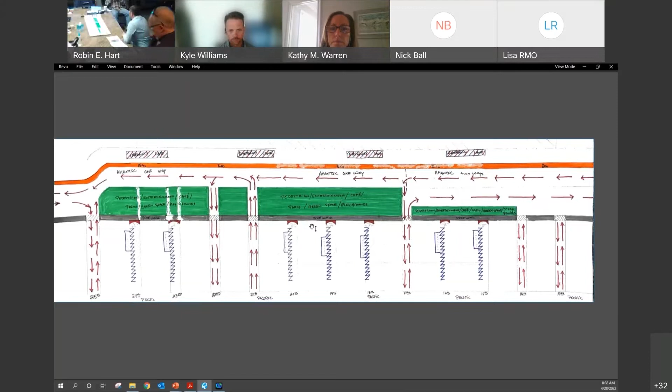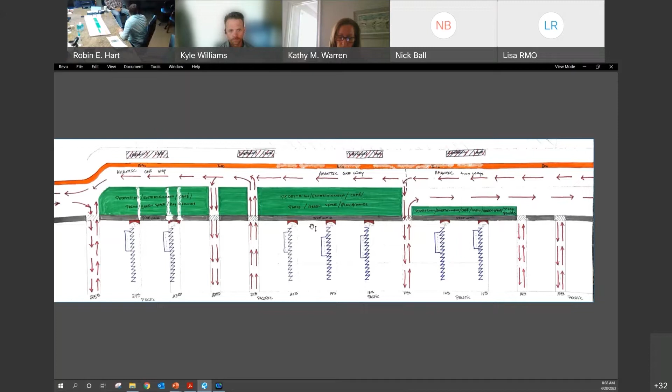So this is just a concept for the core area, between 15th and 25th. What I'm trying to accomplish here is a few things. I'd like for public safety, which should be our number one concern on everybody's mind - without a safe environment, people won't come back. What this does is allow for an area to be managed by creating a more user-friendly, pedestrian-friendly area. If you look between 17th and 21st Street, in the red on 18th, 19th, and 20th, as well as a couple streets south and north - 16th, 15th, 24th, and 23rd - we've cut the road off from going through to Atlantic Avenue.

I got that idea from the neighborhoods, from what they did and how much it helped them. What it also accomplishes is being able to put parking on the side streets between Atlantic and Pacific, and that can be paid parking, just like we currently do with off-season parking, being friendly for locals.

The major change would be Atlantic Avenue from 17th to 25th becoming one way, but we'd leave an area for a bike path as well as an emergency lane for police, fire, and EMS to move around. 25th Street would be a way to get off of Atlantic, and the Fountainhead idea would be at 17th Street. So the main thing this is going to affect is Pacific Avenue.

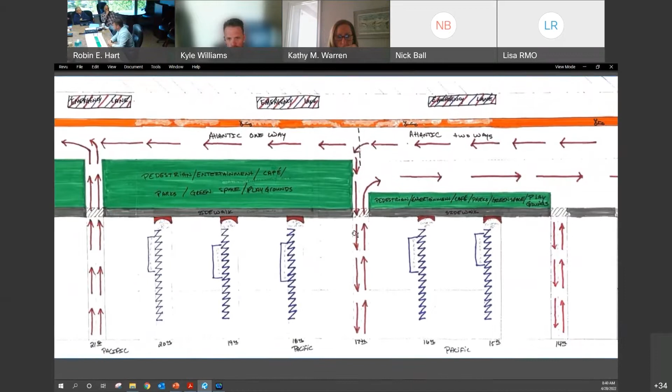Turning Atlantic one way in the core area, coming off the interstate, you would only be able to take a left when you got to Atlantic Avenue, or going north.

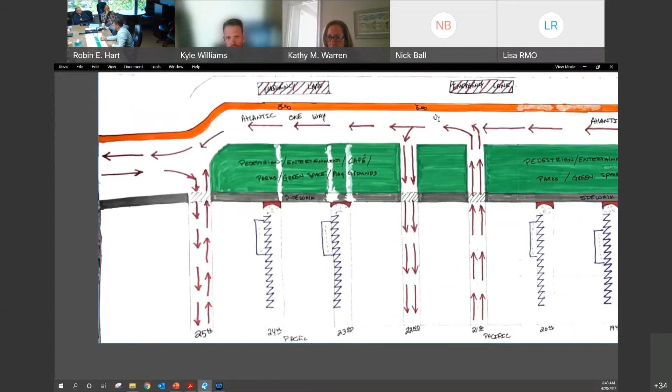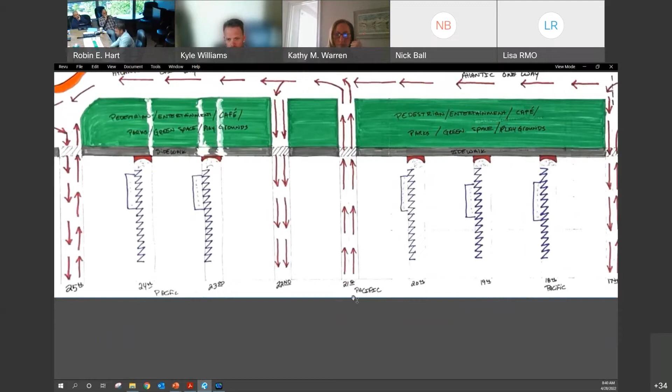I believe there's been discussion about the McDonald's the city has owned, and being able to put in a couple of turn lanes there in order to take traffic south that needs to get to their hotels. I know in the past the hotels have had issues with one way. The last time it was brought up was quite a while ago, before Expedia and stuff like that, where visibility was key.

Now most people look at their phone and drive straight to their destination without having to find a place that has vacancy. So I really want to hear from the hotels, more so than most, about how this can affect them and what could work and what couldn't. I have a meeting with John tomorrow, so I'll get some good input there.

But what it's trying to accomplish is a managed area, which is what we can do with the green. We can turn those into linear parks, and if we're able to call it a park, we're able to open and close the parks. That means if there's any issues down there, we can close the parks and nobody can go into them.

The parks could be used as a pedestrian area, entertainment, cafe, park, green space, playgrounds. My thought process is that these would be elevated to the same height as the sidewalk, allowing for easy flow back and forth.

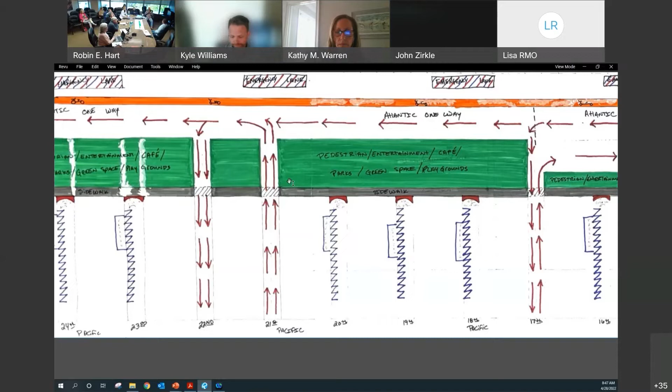Okay, I think it's a pretty unique idea, Mike. I know we're going to talk more about it tomorrow. Just some questions or thoughts off the top of my head. How does this work for bikes? Are you going to have a two-way bike lane through the one-way drive lane, or just not sure how that would come into play. I can see bicyclists aren't going to pay attention to a one-way 10-block radius, more than likely.

Also, with Pacific, the dome site construction, I'm sure that's going to play into this at some point, because I'm sure they're going to have some lane closures and different things, which could cause some challenges. The side streets, when you close them off, I assume there would need to be a turnaround area at the end, because you can't have people pull in and then have to back all the way out onto Pacific Avenue. That'd be rather dangerous.

And then, yeah, hotels do get a lot of walk-in business still, especially in the summertime. You'd be amazed how many people show up in Virginia Beach without a reservation and are either searching on their phone or driving from hotel to hotel to hotel trying to find a room. So it's definitely something we'll want to talk to our association about and get their feedback on. But overall, I think it's a unique idea, something definitely worth exploring a little further.

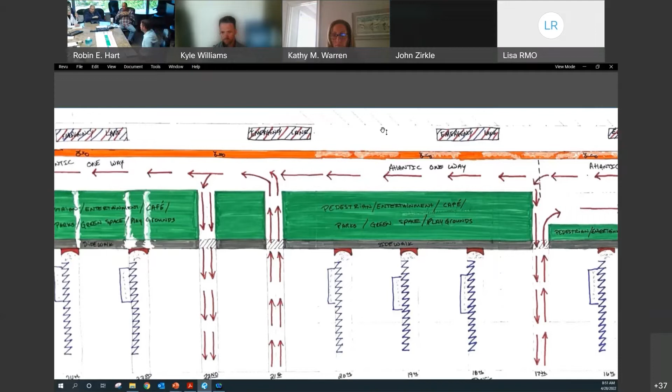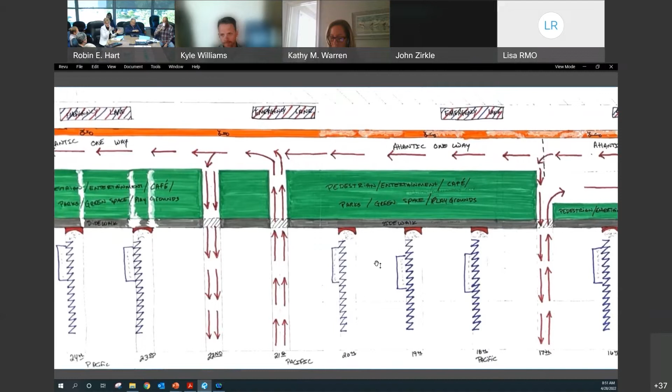I have a question. Yes ma'am. This is an opportunity for a real paradigm shift on Pacific Avenue, and I see us trying again to add more traffic to it. Going back years now, at one point we talked about making a ring road or separate area that moved that through traffic off of this area, coming around Bird Neck area, coming back up on Laskin Road. That would create this area being something special because there's a tremendous amount that cuts over - Rudy shoots through all the way up to the north end going however many miles per hour.

So is there a way to factor that in, that instead of putting more, is there a way we can redesign this so it actually pulls that through-traffic back? We're not trying to clog up Pacific Avenue with through traffic - when you come here, this is a destination area, not a cut-through area, because I can see if we're not careful, these people are going to be cutting off and going through.

Arctic is going to become the major freeway, Mediterranean is going to become the major freeway if we don't figure out a way to get people's mindset to understand this is something different. You have come here as a destination, it's not a through street. So I'm willing to explore this to see what we can do, but I need to be careful about how much we push back into these neighborhoods if we're not careful.

And I don't want to see Pacific Avenue become more clogged, faster, with 10,000 extra cars. If anything, I'd like to see us make Pacific Avenue a much more gentle street. Since they've added those new sections up above 31st Street with the islands and the overhead park, it has a different feel - people tend to be going a little bit slower, there's just a sense to it. Once you get past 31st Street again, it's like Katie barred the door - we're going to a fire somewhere.

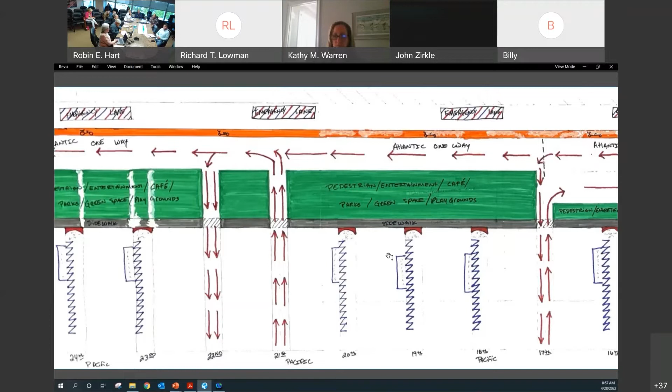Never is. Okay, I think it's a great opportunity and unique, like has been talked about before. My concern would be with the busy days we have during the year. Public safety will be an extreme stakeholder in this when traffic gets congested in the oceanfront area—if they have to respond with heavy apparatus, police response, EMS, should there be an incident. If you move everything to Pacific and the back streets, everything's going to become even more congested on the busy holiday weekends we've got. So the public safety folks are going to have to weigh in pretty significantly.

I had an initial conversation with Captain McBride, and it was met with reserved enthusiasm. He seemed to really like the concept, but wanted to see what it could do. From a pedestrian crowd control standpoint, he saw a huge benefit for it. We didn't get into the details too much, since it was over the weekend and I was kind of hanging out in front of the substation with him.

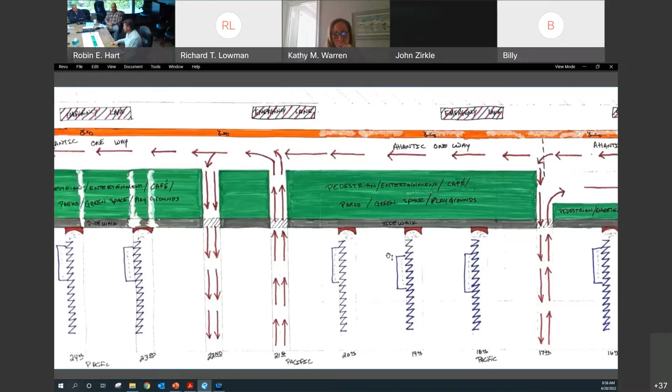One thing I didn't mention is 17th Street would become kind of the major area for a lot of traffic. We have a very timely and unique ability right now to mold how Virginia Beach Boulevard at 17th Street works—it's going through design right now. Instead of having a lot of that traffic come off 21st Street and go south to 17th Street to get on Atlantic, if we could get Waze, Google Maps, Apple Maps, whatever, to route people going southbound on Atlantic past 17th to get off at Bird Neck and come down Virginia Beach Boulevard and take a right—I'm not a traffic engineer, but it could alleviate some of that stress on Pacific between 21st and 17th.

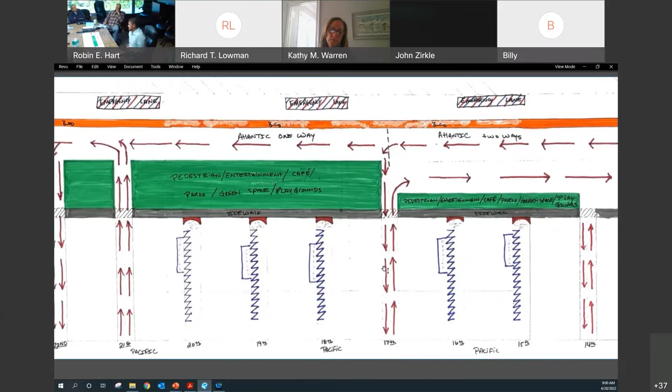That was one other thing. I don't know if this has been addressed, but Chris Nykirk had a question in the chat asking how the parking streets work, turnarounds at the ends. I think what she's trying to say is, is there enough room for people to turn around in the cul-de-sacs, and how much parking can we get there? These are answers that I don't have.

Yeah, the mall in Charlottesville is what is in my mind on that, if you've been there, and it's tight. It's messy on Saturday when everybody's down there. If you pull in there, it'll take you a while to get back out, but you can do it. There are curb cuts at the end that go into parking lots, and if you don't want to stay, you don't have to. You can get out. I've done it, I've seen people do it, but it's not easy.

Well, I think it's important to note that this is very preliminary, so we're not even at that design stage, but we know there's no way this can progress if we can't get people in and out smoothly.

And the Charlottesville Mall idea that was just brought up too - one other thing to point out there is there are streets that go through the mall. So just using 19th as an example, it's curb level, so it's apparent to the driver that you're driving through a pedestrian space. So there is maybe a hybrid here where these are partially open, closable, something like that. I think these are all details we need to flesh out if we look at this going forward.

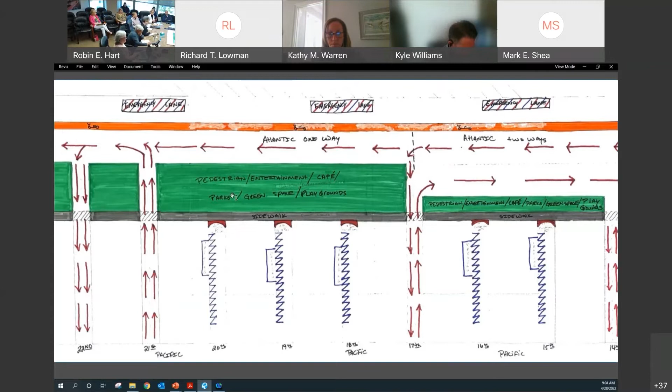Is it one? If we're trying to reconfigure and we have an opportunity here, some of these, I don't want to dismiss them, but is there a way we can work with these folks, maybe tighten them up? I'm looking for ways to make things happen rather than ways that become stumbling blocks that we never move off dead center, and we just stay with what we have today, which we know is not our most ideal opportunity. So how can we work with some of these folks?

Mike's right, the only option you have is the emergency lane, so public safety's got to be involved in all of this, and maybe that's something to be looked at. A lot of times it's thrown aside, as we'll get to it later, but it needs to be addressed up front. I agree - everybody's got to get deliveries. That's one of the details we need to look at.

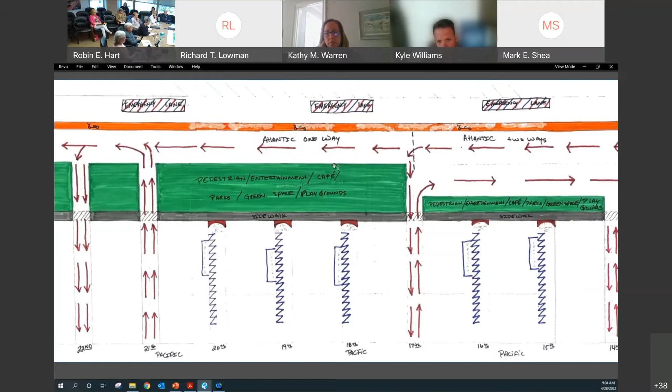Definitely. I think one good thing is that it's very compact in the area we're going to be doing it, and it's in the area that needs the most help. The south end is okay by itself, we don't have as many issues there, as well as the north end. Central Beach is stressed with people, vehicles - it's got the most concentration of people, which when you have concentrations of people, you have issues that arise from that too.

I truly believe that this can help every single issue that we're actually trying to solve. I wouldn't have brought it up this late in the game and tried to get some consensus to at least explore it further if I really didn't think it was going to be beneficial.

And we could even turn this into something iconic for Virginia Beach. We could do the landscape so that it spells Virginia Beach out, so from an aerial it kind of gives that, and that's what you think of when you think of Virginia Beach, is that area, just like the Charlottesville Mall.

Or we could do something fun, make waves out of landscaping, just something different and unique that everybody will remember. Virginia Beach by...

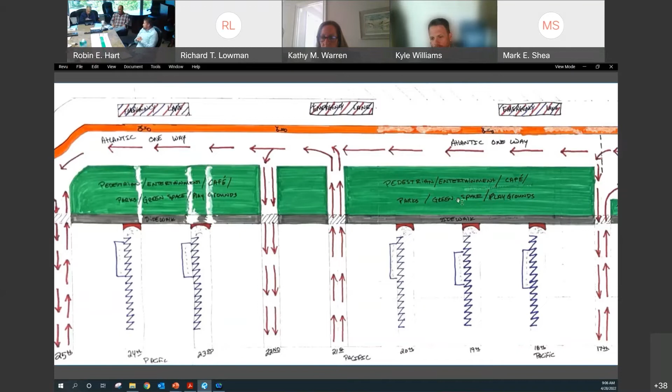BJ and Martin. Kathy, I just wanted to throw one thought out on the table, and this isn't just for this scenario, but in years past we had a program that really emphasized getting off at Birdneck Road and accessing the beach from a lot of different areas. I can't help but think that would serve us well to incorporate into whatever we come up with. I think at that point we had designated Norfolk Avenue, and there might have been a Sand Dollar, or 19th Street or 17th Street - I forget what the streets were, but we had a pattern people could follow coming in. Just a thought that might help in a lot of instances here. It might alleviate some of the issues we're talking about as far as Pacific Avenue and keeping the traffic from getting pushed back into the neighborhoods. Just a thought.

That's a good thing too, to mention. The traffic study that we're going to see with Pacific Avenue, I would imagine, is going to be extremely high volume. But if we're able to make these changes, like BJ said, and possibly get the routes changed in Google Maps to get people to their hotels, I think those numbers could possibly stay the same instead of increasing even more. But studies will tell, I guess.

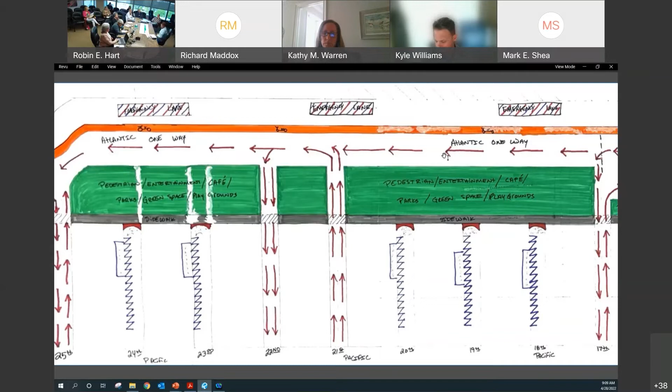Thank you, Richard. You're welcome. Anyone else? Hey, Josh Goyet from the fire department. Can you hear me? Yeah, yes, yes.

So just from a fire department or public safety aspect, some considerations with this. We like the fact that you've got the emergency lane going because that's going to be important for us, giving us access to all the buildings on the east side. But any fire or incident on the west side of Atlantic, especially with the green space, puts the buildings further away from our trucks. Depending on where the hydrants are, whether we move them or not, we'll obviously have to get close, so we can't do that work from the emergency lane. We end up in the travel lane for those incidents, which means we likely have to shut down this section of Atlantic Avenue for any even fire alarms for incidents on the west side.

And if we divert a whole lot of traffic, 17th Street then gets really backed up. Just keep in mind that's where the fire trucks and EMS trucks tend to come from, because that's where the station is.

So just some consideration - even though everybody else will have to turn south when they get to Atlantic off of 17th, we will need that ability. There can't be a shut off for us to be able to turn left there, because that's going to be our access, and we can't go around the entire Rudee Loop just to get to where we need to go.

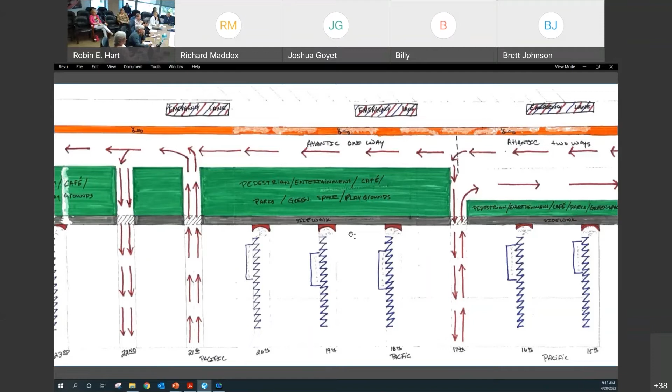One thing guys, just for us - we see the questions in the chat, but I think we need to, and Kyle I'll leave this to you, but I think if we want to accomplish what we want to accomplish today, we need to probably move into the document. Understanding that we're going to the Hotel Association on Monday, we've got to talk to public safety. So far we're hearing a lot of good comments on this. So what we're going to have to think about, depending on the outcome of the other stakeholder groups, is how do we move the plan forward?

We have a lot of initiatives that we're going forward with regardless. Obviously the pilot - there's work that we can do on the whole north end of Atlantic Avenue. So it's not to say that if we explore this further it's going to stop the progress. We just need to have some conversation internally and with the steering committee about how to move this thing forward.

I think it would be beneficial, Kathy - we've gotten a couple initial comments from fire and EMS as an example, but I think it would be beneficial if you all could create us a list of considerations that we need to be looking into as part of the study, or sub-study, of this area. That way we can get our heads around what types of things we need to be evaluating. And I would look to the individual technical experts of those specific areas to guide us on that - that could get us started with at least a short list of things we need to be checking each of the boxes on.

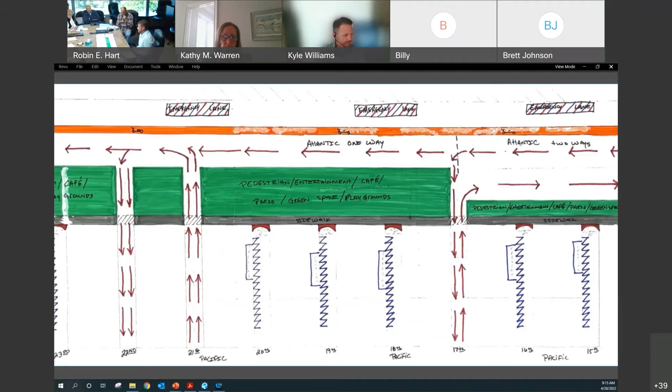All right, I'm going to flip back over to this. I'm going to hit the one-way concept fairly quickly with the connector streets, just to give a brief overview. Again, this is going to be another one that's going to require some additional conversation. This probably will come into play as we're looking at the new concept for Atlantic Avenue.

But just to give a brief overview of the conceptuals of what we've looked at to date, the intent of this is to try to one-way the streets between Atlantic Avenue and Pacific Avenue, with the main intent of creating additional on-street parking, either through the ability to angle the spaces and create more stalls, or in some instances adding additional parallel spaces, just depending on the width of the street.

The screen capture I've got here is just 34th to 37th Street. We would be keeping some of the key corridors two-way, so for example 5th Street, 9th Street, 17th, probably 18th with the emergency access, 31st Street, 30th Street, et cetera.

But just preliminary thought on how much space or how many spaces we could potentially add, anywhere from 64 to 170 spaces, just depending on the configurations of the street. So again, more conversation, more study, traffic impacts related, access to properties and parcels, and just some of the things that need to go into this a little bit more before we advance it forward. But again, just wanted to bring your attention to that.

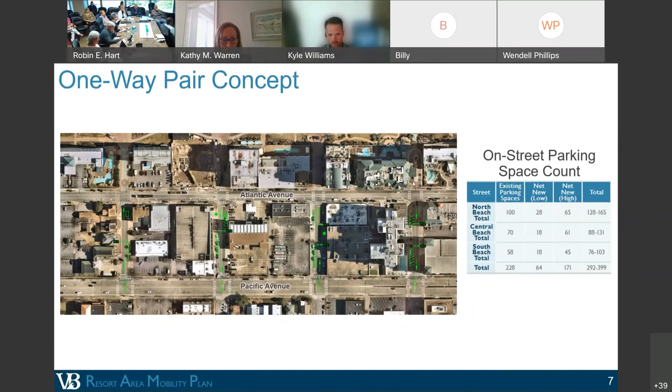And then Jonathan, I think you are up. I'm going to turn it over to Jonathan for document preview, orient you to what we've pulled together, where we're going to be hoping to get some of your input and feedback. And I will stop sharing and allow you to take over control.

Sounds good. So yeah, when we think about what's coming your way next week, we're really kind of characterizing this as a review. Most of the information that you're about to see over the next week is information that's been previously shared through a lot of our previous meetings or previous surveys, or even some documents that landed in your hands previously. Some of that information is packaged a little bit differently, but for the most part, it truly is a review of stuff that you have already seen.

With what we've already discussed this morning, over the next several days, we are going to continue to make a few tweaks to the document as it currently stands before it lands in your inbox. And part of that is to potentially figure out how do we advance the overall mobility plan while still leaving the door open for exploring this new concept for the central beach area.

And so with that, we're going to provide the report early next week. And as Kyle alluded, we have created a survey tool for us to collect input from you all. That survey tool is SurveyMonkey, so it should be familiar, similar to some of the other reviews, most recently with the multimodal and the parking strategies that you all provided input on just a few months ago.

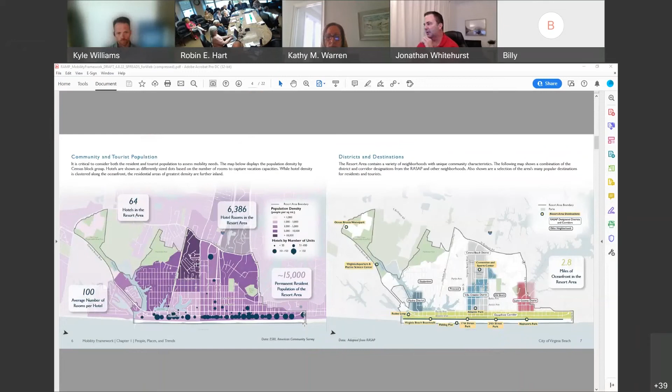This would be volume 1, the mobility framework. It starts with acknowledgments, table of contents, and then we get into the meat of people, places, and trends. This is the summary of existing conditions about population and where people are traveling. We've got a spread here about special events.

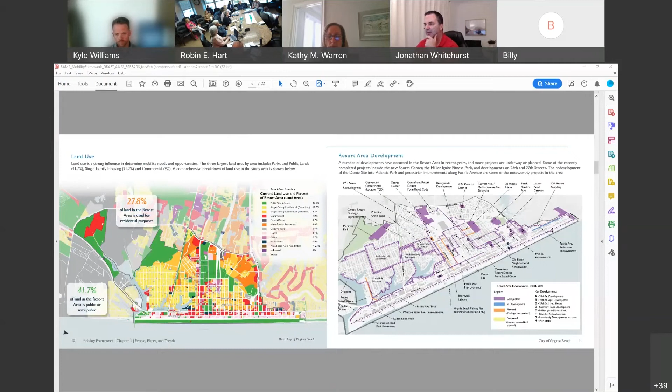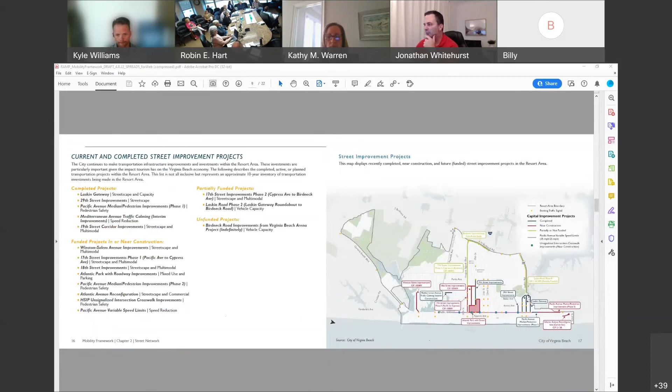We get into land use and the resort area development that's been adapted and updated from what you all may have seen in the RASAP a couple of years ago. We have a section about the street network, where you'll find more detailed information about traffic and congestion. We highlight the current and completed street improvement projects.

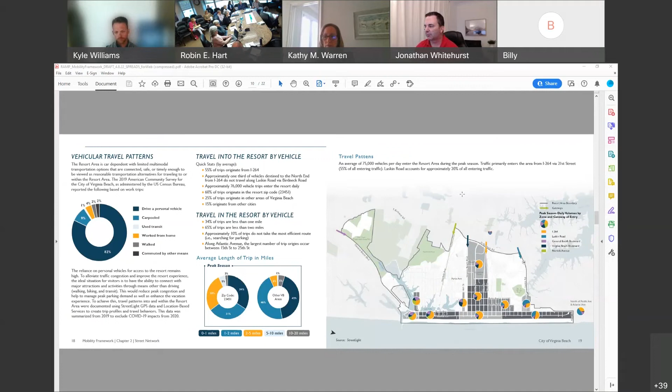Then we get into a lot of the details you all have previously seen related to how people are moving around the resort area in terms of vehicle delay and crashes and traffic safety. For the active transportation section, we're providing an existing overview of the bicycle and pedestrian facilities, and we're taking information from the active transportation plan and showing bicycle level of stress.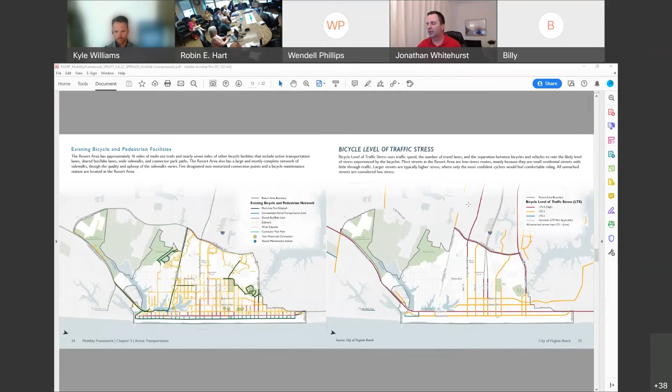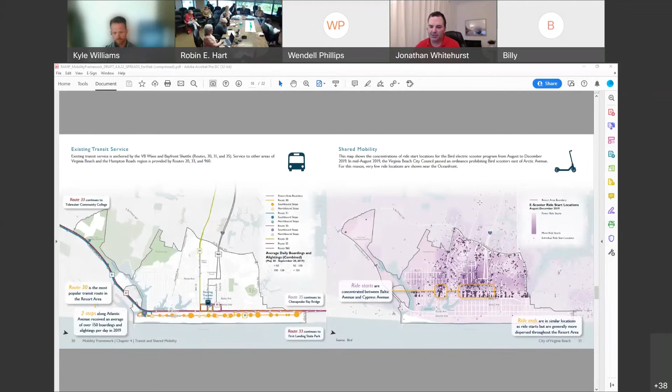And then we get into transit and shared mobility. Here we're reviewing the different bus routes that exist and what we've heard related to transit and the trolley and all of that. We have some information here on shared mobility, so the scooter trips as well.

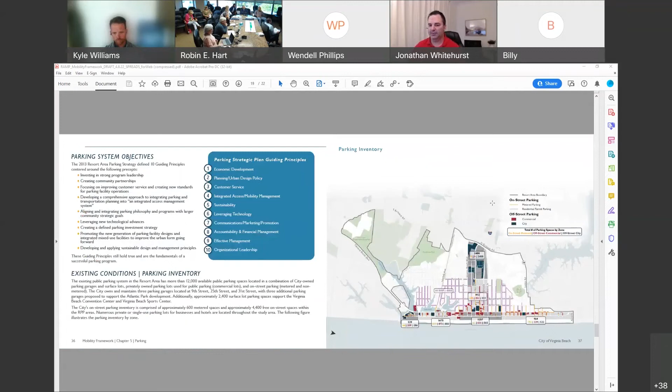The parking section for the mobility framework again goes into both the supply and the demand side of parking. All of this is to tee up the parking strategies and parking projects that are recommended in volume 2. We conclude the parking section with an overview of parking rates and then a quick recap of the RPP program. And that's really it.

So that's the first volume, all about existing and projected conditions. So when the survey tool and these documents arrive in your inbox next week, what you're really going to do is focus your attention on the second volume, which is where all of the recommendations are included.

We've got an executive summary here to tee up the process, an introduction in terms of an overview of the mobility process and how it all came together. A quick recap of the guiding documents. We've got the mobility vision and goals here on this spread, and then we jump right into the strategies. The strategies themselves are put into 2 separate buckets: the multimodal strategies and the parking strategies.

As I mentioned, what you're seeing here in volume 2 is really just a quick sentence or 2 about each of these strategies. But if you were to flip over to volume 3, the appendix, you'll see that the information is repeated a little bit, but there's just a lot more detail. So as you're reviewing, if you see, okay, I don't quite understand what exactly strategy 1.2 is under objective 1, go to the appendix, read a little bit more about it, and hopefully it'll provide you the background you need to weigh in on that particular strategy.

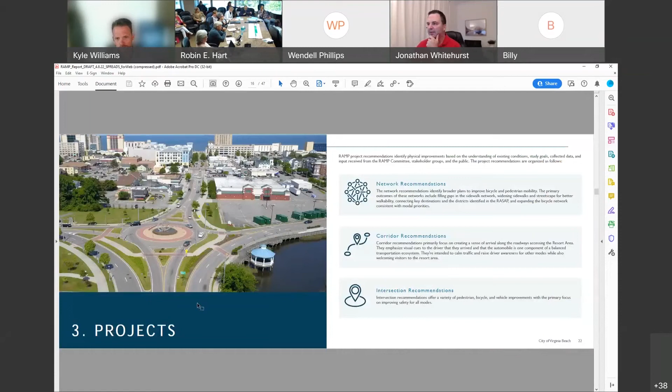The next thing in volume 2 is the list of projects. We've grouped these into network recommendations and then corridors and intersections. The network recommendations are the recommended bicycle network and the recommended pedestrian network. Again, this is information that should be familiar to you all if you've been following along as we've been going through this process.

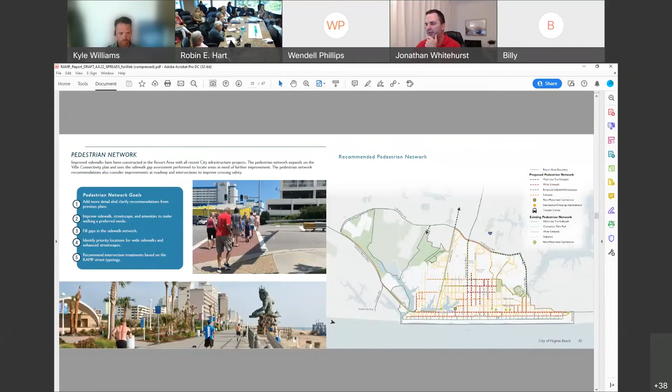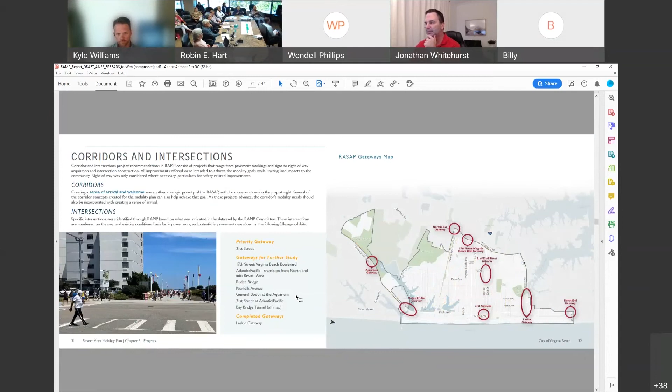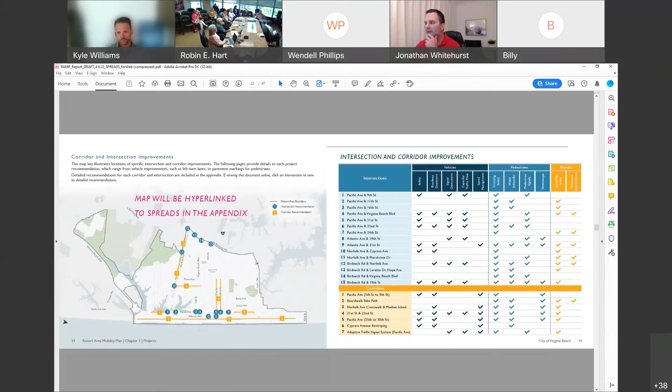The corridors and intersections section provides a quick overview of that information and then directs you to the appendix if you want to dig deep into a particular location. The corridor and intersection improvements are shown in the table on page 34, telling you what types of improvements are needed at different intersections and along different corridors. Eventually, we're going to hyperlink this information so that it's easier to navigate through the document.

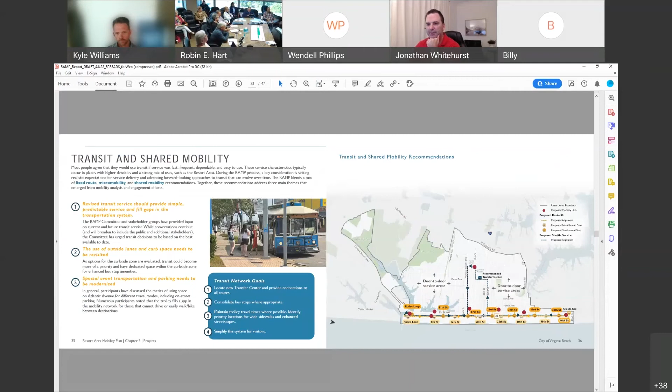As it relates to transit and shared mobility, we've grouped these recommendations into a few different categories. We've got route recommendations, which talk about changes to Route 30, adding the fixed shuttle service, and creating the new transfer facility. We've got the microtransit recommendations, where the RAMP document makes reference to the pilot project that is about to get started very soon, and then how we take the information from that pilot project and eventually evaluate what is the best permanent solution for microtransit and the trolley in the future.

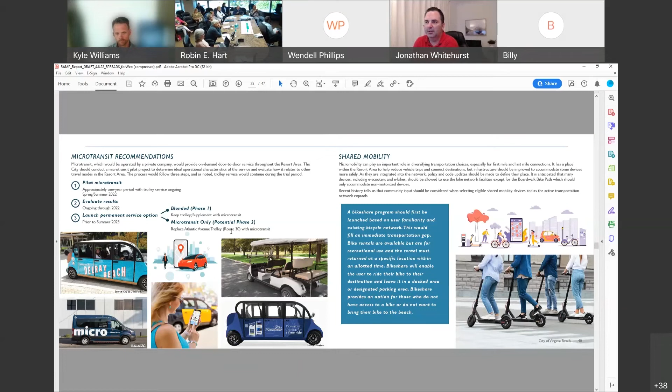For parking, we've got some specific parking projects. We talk about parking wayfinding, and the off-street and on-street parking inventory, and some of the projects that could be used to increase parking supply. Kyle alluded to some of those just a couple of minutes ago.

The fourth section of this volume is about Atlantic Avenue. Here we provide an overview of the process that we arrived at to get to the recommended concepts for each of the three segments: the segment north of 25th, the segment south of 17th, and then that middle section that we're going to evaluate in a little bit more detail.

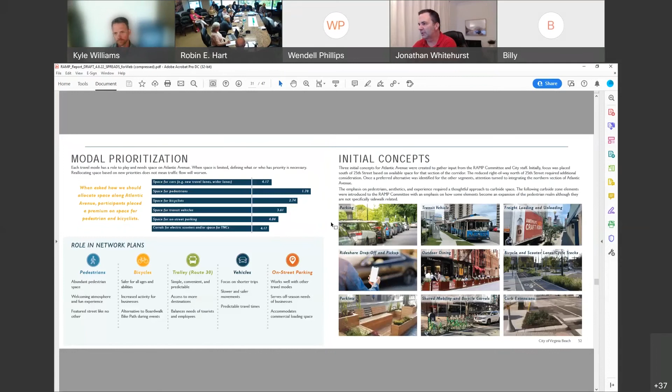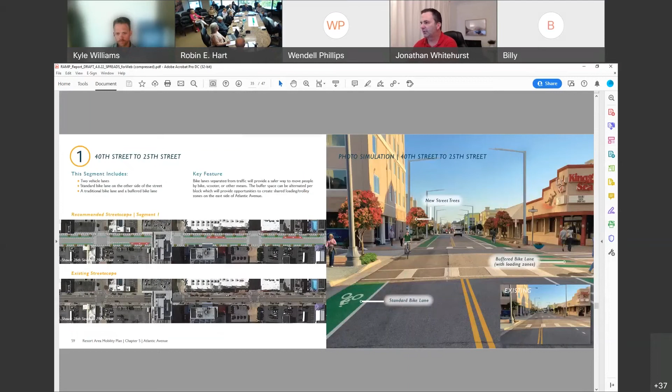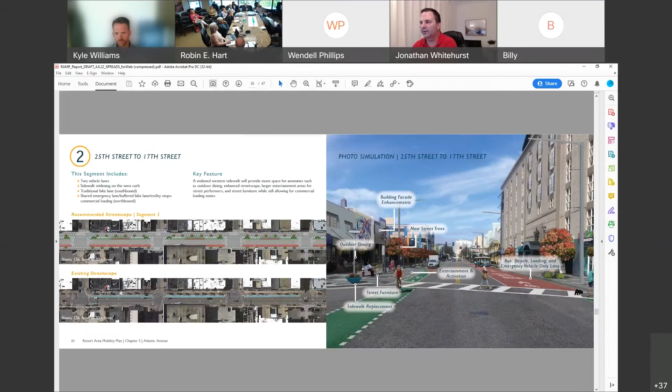For each of those sections, we're providing the existing streetscape, the recommended streetscape, and then a photo simulation so that you can visualize what the vision is for that particular section. So that's 40th to 25th, 25th to 17th -- and again, this is one that we might need to pull out of this particular report so that we can allow the due process to evaluate the new alternative -- and then 17th to 5th.

Then there's a series of design considerations that we're going to ask you to weigh in on. Here we're talking about different design options that could occur at any particular intersection along Atlantic Avenue. You can see it's color coded on the line, starting with 5th Street and going all the way to 40th. It's saying, for this particular intersection, this is what should be considered as improvements are made in the future.

Then we get into the action plan. This is one of the last sections. Here we've taken those objectives and strategies from the multimodal strategies and parking strategies and pulled them into a summary: is this a standalone project, what is the duration, how much staff time is necessary to implement a particular strategy, what is our perceived level of impact -- is this going to really turn the needle on what we're trying to achieve in the resort area, or is it more of a smaller improvement -- and then whether or not the private sector is involved and how we could go about funding it if funding is necessary.

We are showing some phasing, so short-term, immediate, long-term, that kind of thing. Now, when you get the survey next week, there's not really a whole lot of questions specific to the action plan, but we do welcome you all to review it. If you've got questions or comments, there's certainly a place in the survey where you can provide that input.

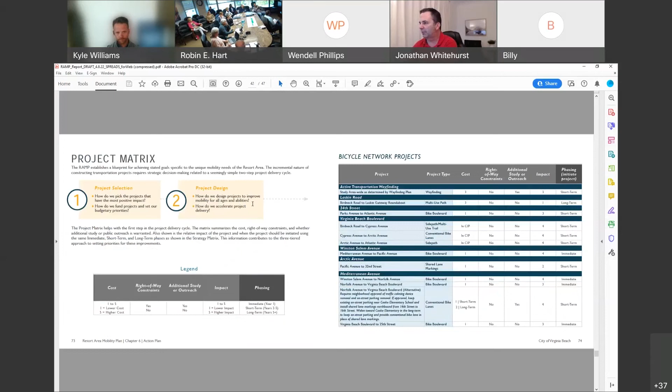We do something similar with the projects themselves. You'll see that we've got the bike network projects, the corridor projects, and the intersection projects pulled out of that previous chapter and placed here again with some level of guidance as decisions are being made, in terms of what is the cost and what are the right-of-way impacts and those kinds of things that are much more applicable when we're talking about infrastructure and physical projects as opposed to strategies and actions that are more administrative.

That's pretty much the bulk of the document. There's a brief section here, kind of a conclusion, if you will. I know you all just drank from a fire hydrant for probably the 15th time today, but wanted to pause there before I pull up the survey tool just to see if there are any initial questions about what's going to land in your inbox next week.

I only have a comment, not necessarily a question, more of an administrative one. From a timing standpoint, how will this be rolled out so that the entire RAC Commission has the opportunity to digest all of this information? I know that TPPC will be looking at it, but at some point this has to be presented to RAC, and I would like for the commissioners to have had an opportunity to digest it prior to that meeting. I would suggest that when it comes to TPPC, it goes to RAC at the same time.